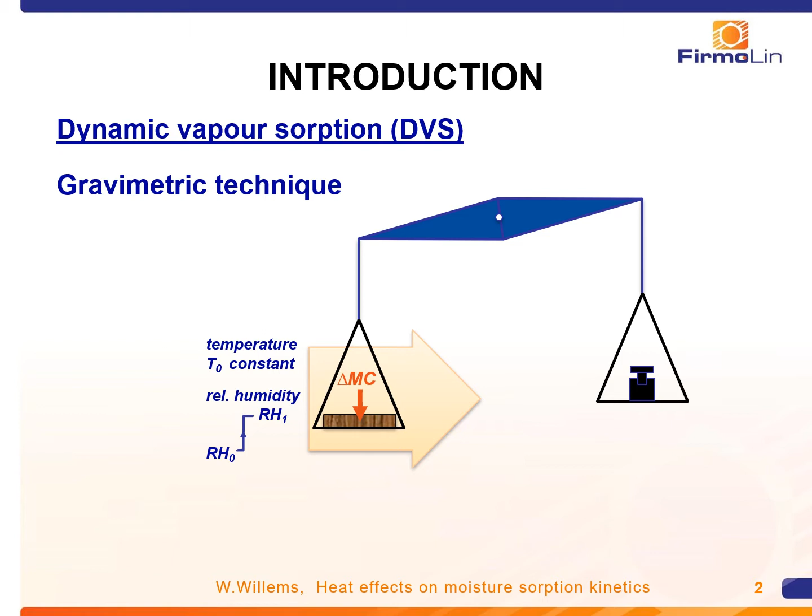My talk is about DVS, an experiment where the time-dependent wood moisture uptake is recorded by weight changes after a relative humidity step in the ambient. My study focuses on the conditions wherein the moisture uptake rate can become controlled by heat, which is released when water vapor condenses into wood.

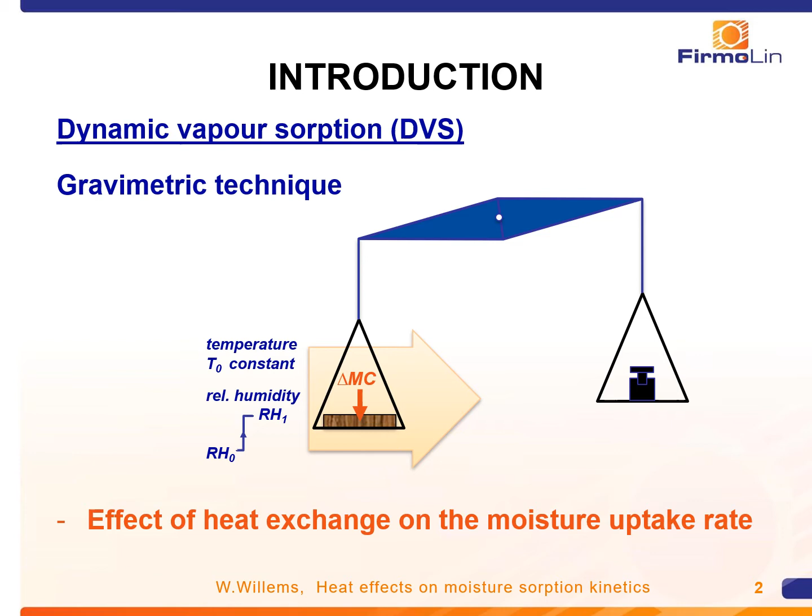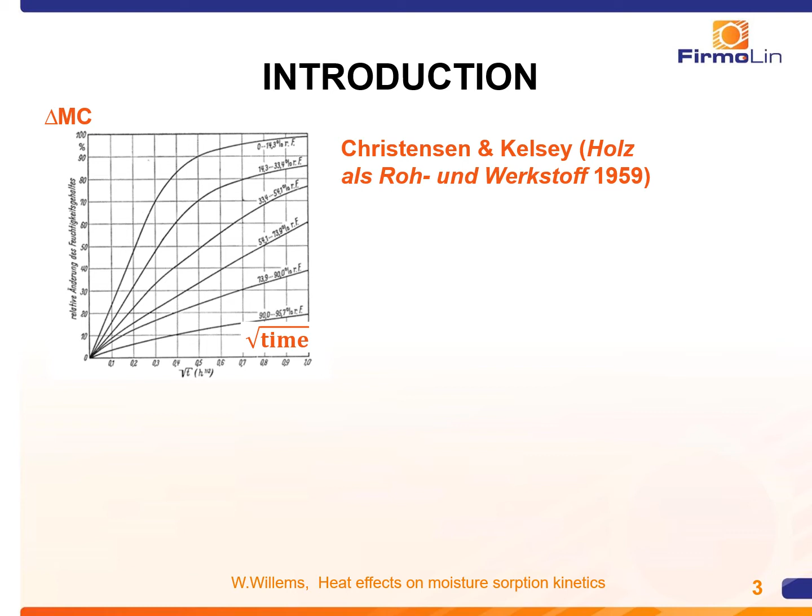Here is a set of moisture uptake curves from this classical study of Christensen and Kelsey. Ever since their 1959 publication, it has remained a question why the uptake rate is depressed at high RH.

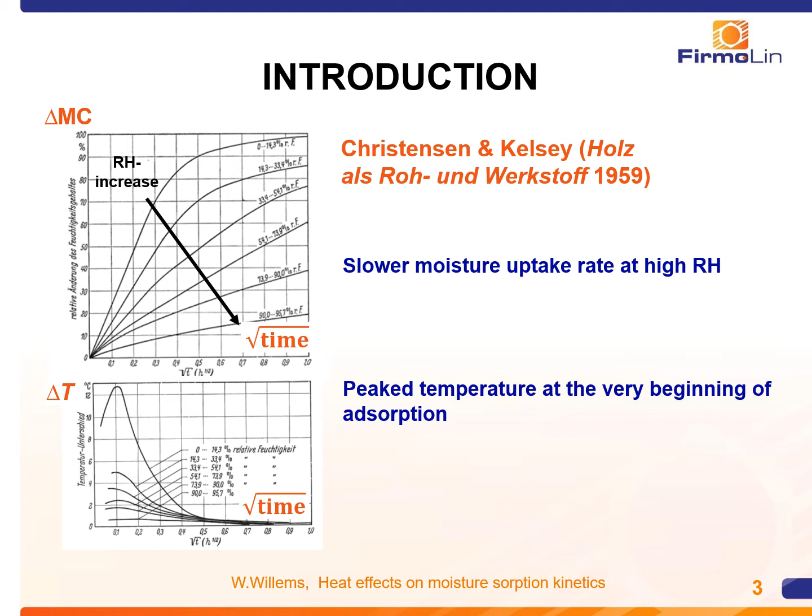The associated heat exchange is evidenced in wood temperature elevations, but these appear only peaked at the very beginning of the moisture uptake curve. With increasing RH, the peak temperature is strongly reduced, and it was therefore concluded that there is no thermal origin of slow kinetics. However, that view is incomplete.

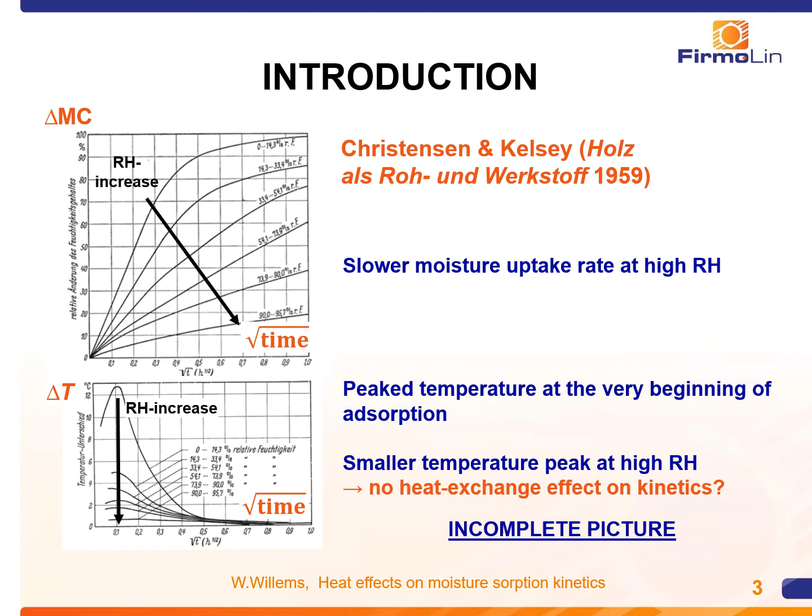Besides the induced temperature elevation delta T on moisture uptake, there is also a consequential effect of delta T. Delta T decreases the local relative humidity around the sample, resulting in a lower EMC, which influences in turn the moisture flow to the sample. A final EMC can only be obtained when delta T becomes zero, which essentially requires an efficient heat exchange with the ambient to get rid of all accumulated heat.

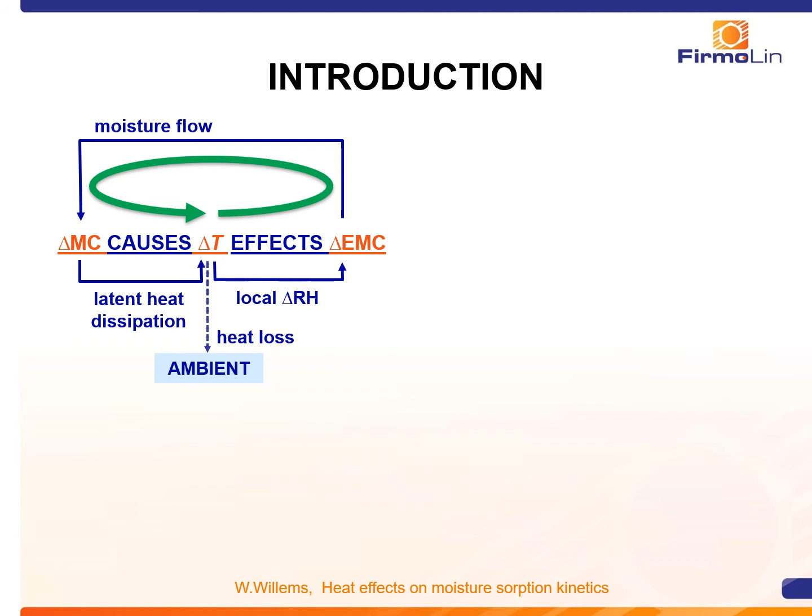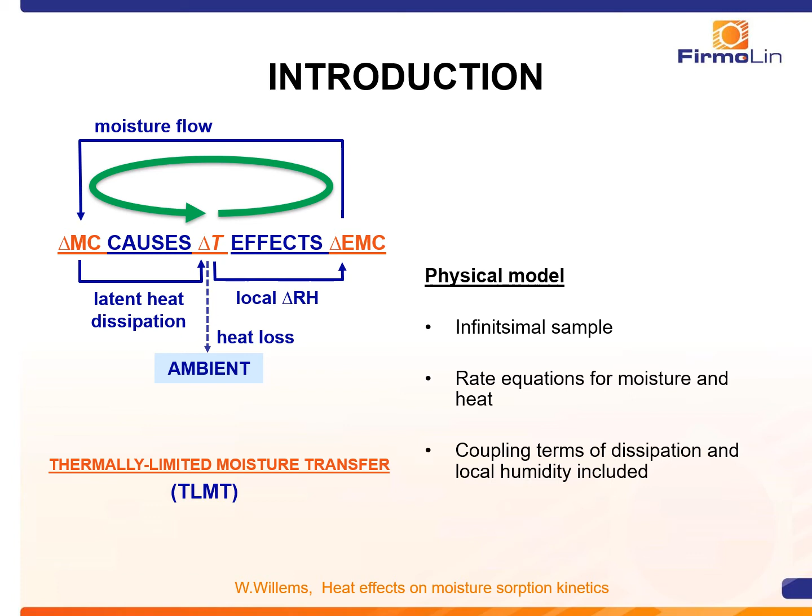I assigned the name thermally limited moisture transfer to this mechanism, which is analyzed in the developed physical model that rigorously calculates its dynamics. The rate model can be exactly solved. First, without heat-moisture couplings, one finds a simple first-order response. And after adding heat-moisture couplings, a similar response is obtained, but with a timescale factor.

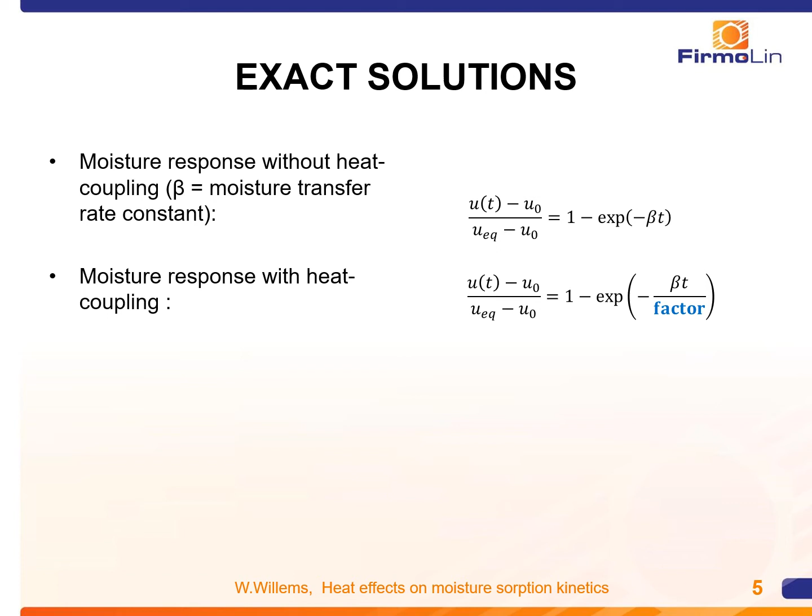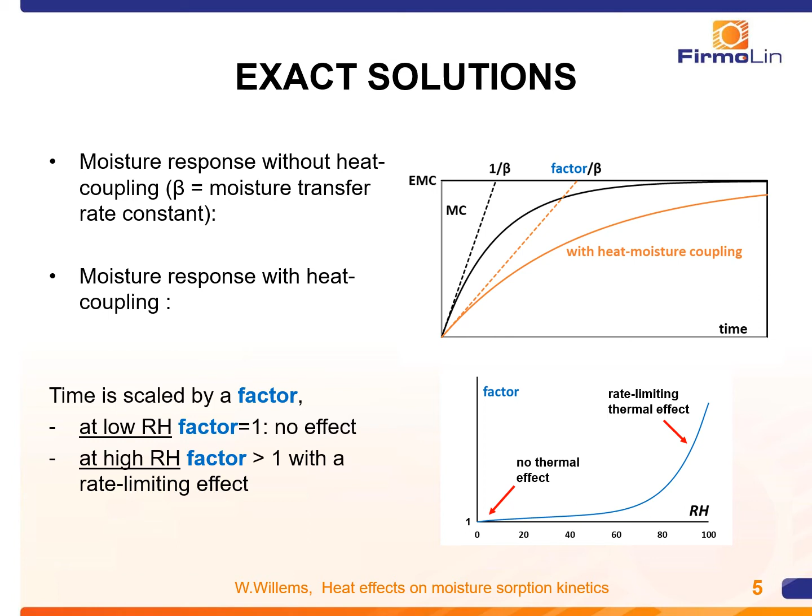In a graphical representation, the response is increasingly time-stretched by a stronger heat-moisture coupling factor. This factor is calculated to be unity at low RH, giving no effect, but increases strongly at high RH, yielding a retarded response at high RH.

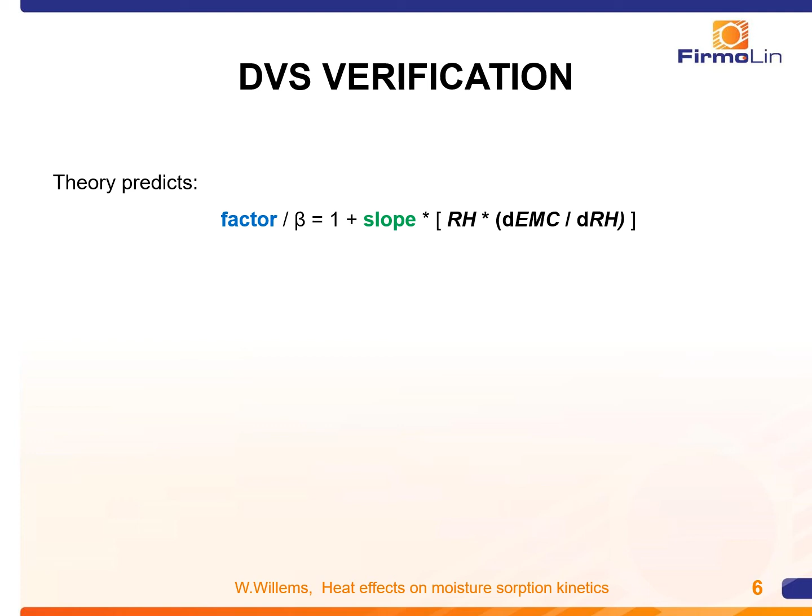The predicted theoretical RH trend of the timescale factor is a linear function of the product of RH times the slope of the moisture sorption isotherm. This linearity is indeed confirmed by DVS data, with one example given here.

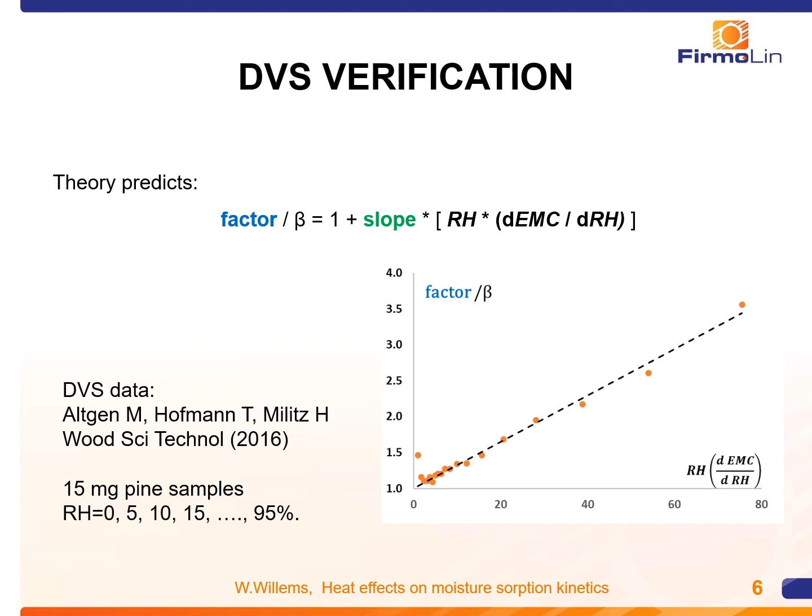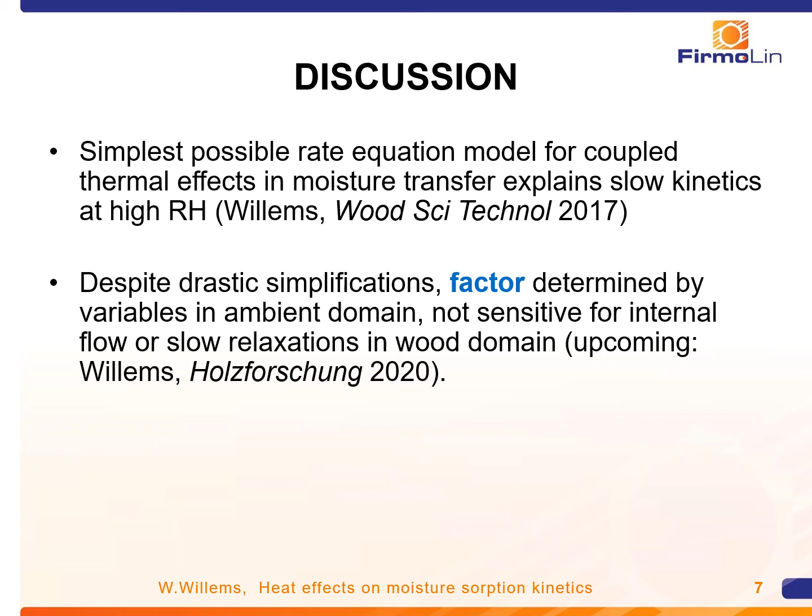So the simplest possible rate model for coupled heat-moisture effects explains the reason for slow kinetics in small wood samples at high RH. The thermally limited moisture transfer model appears to work despite drastic simplifications because the mechanism acts via the variables in the ambient domain, relatively independent of internal wood moisture transfer and relaxations.

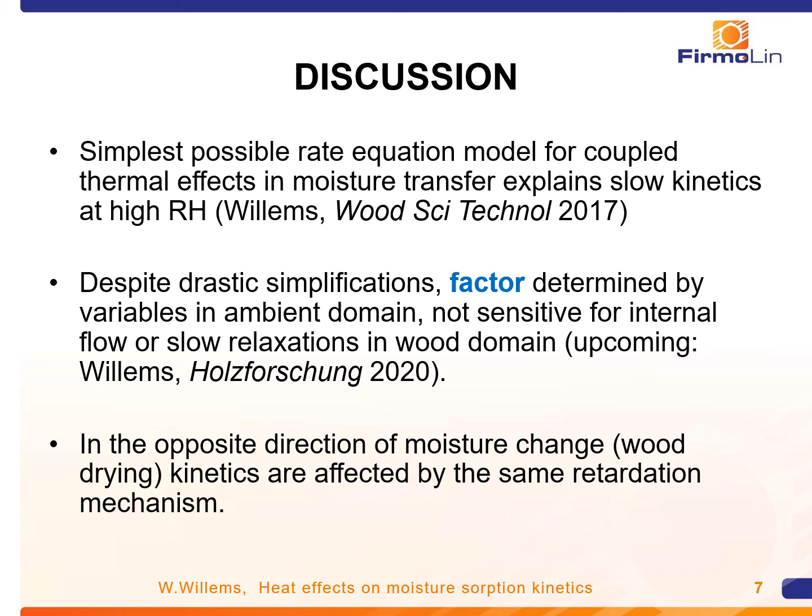Without further explanation, I just mention that for the opposite direction of moisture change, wood drying kinetics are also retarded at high humidity by the same mechanism as for moisture uptake. I want to conclude this talk that the effect of heat on moisture dynamics is counterintuitive, namely a large thermal peak with little effect on kinetics at low RH and a small thermal peak with large retarding effect on kinetics at high RH.

The mechanism acts in heat and moisture transfer processes at the boundary between wood and the ambient and can easily be incorporated in existing numerical wood moisture transfer models. The described mechanism suggests the importance of a proper thermal design of experimental setups where the wood moisture content is supposed to change, notably at high RH.

The thermal effect appears to have a time-scaling action on the entire moisture response curve, which might be used to remove thermal effects from DVS data, which work is in progress.